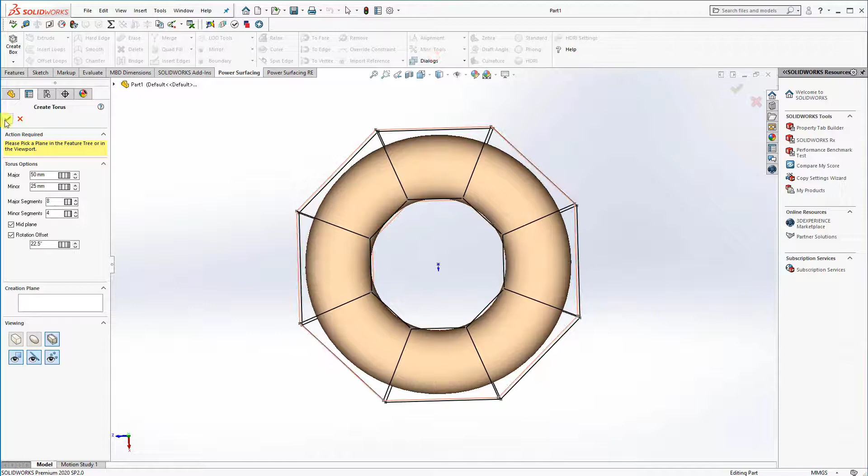In this video, I'll be making a simple ring design to demonstrate some of the features available in Power Surfacing for SolidWorks. I start by creating a torus and rotating it to be in a better orientation for editing. I then crease the inside faces and adjust the inner diameter.

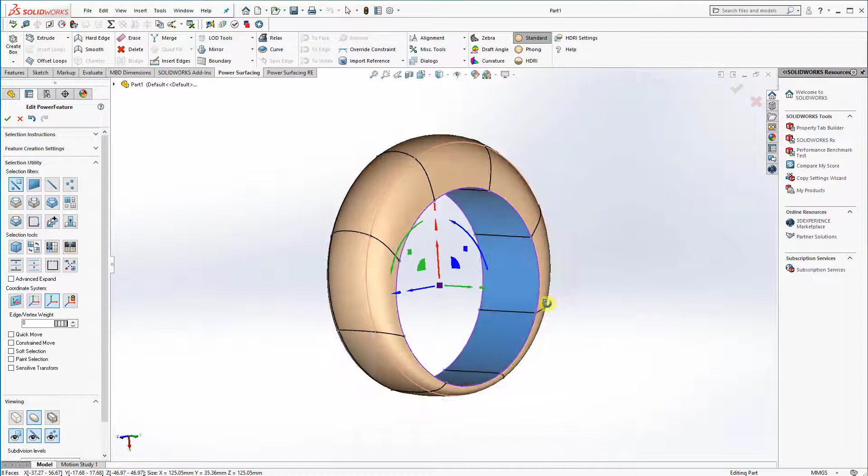Next, I turn on soft selection and set the value to 70 to distribute the effects of my changes over a larger area. I then select the bottom section and narrow it to give the ring its overall shape. Next, I adjust the top face and crease it.

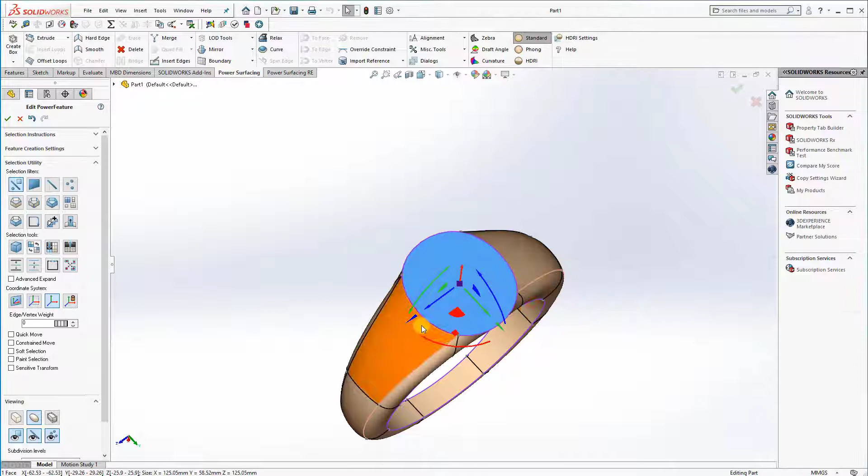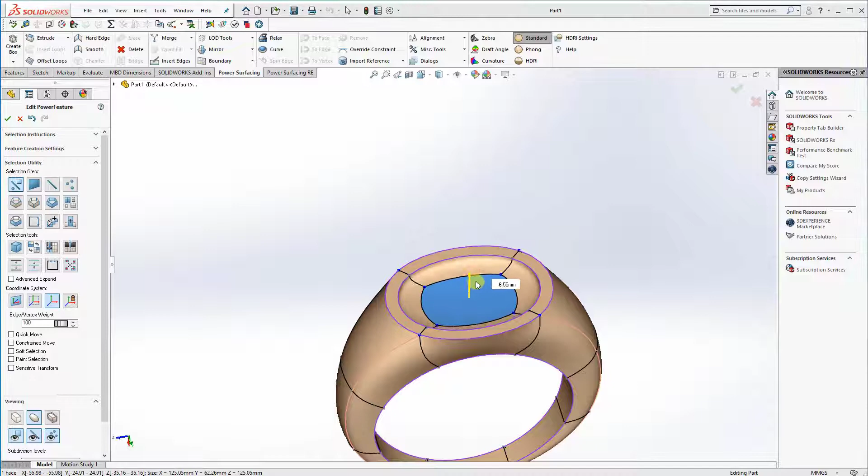I then use the offset loops tool and crease it again. With the top face selected, I hold the A key and extrude the top face into the ring. Now I use insert loops to square up the shape a bit.

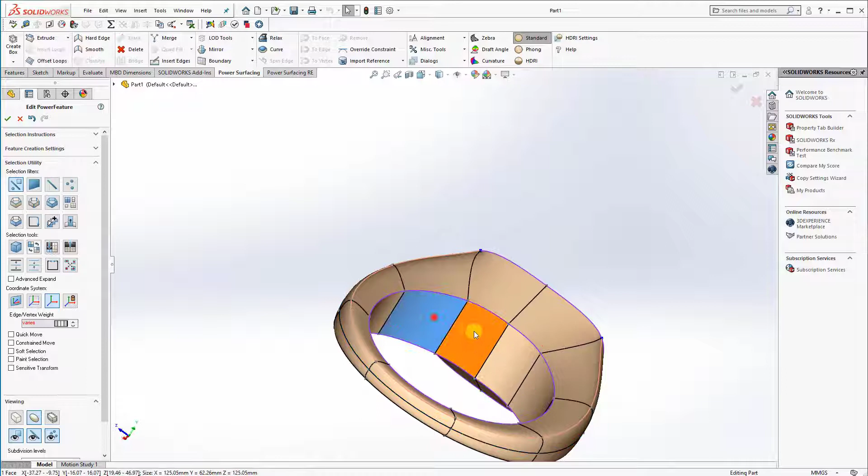Looking at the bottom of the ring, I select the 4 faces on the underside and use offset loops. I then crease it and adjust the width a bit. Now, holding the A key again, I extrude these faces into the bottom of the ring to reduce the material usage.

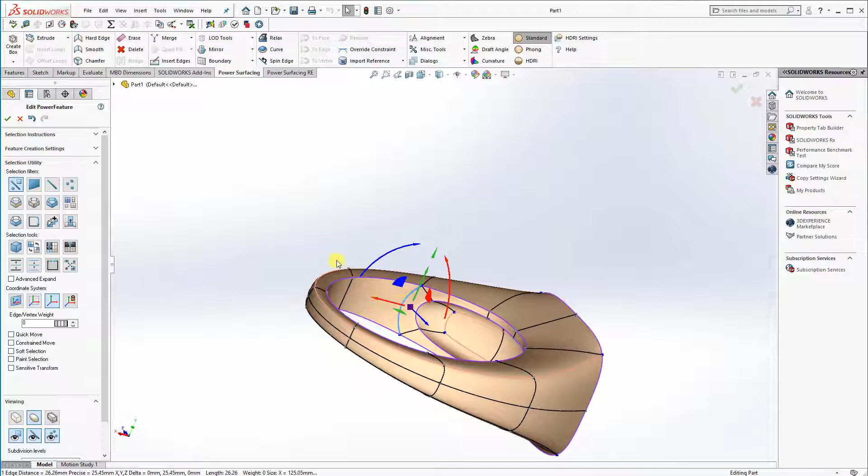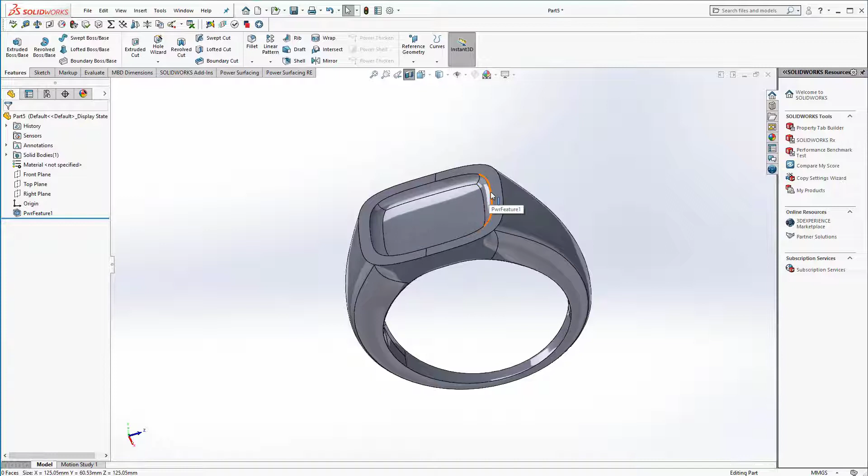Finally, I adjust the edge weights and remove some extra edges to smooth out the overall shape. From here, I can convert it into SolidWorks. Using one of the top edges as a reference, I create a plane. Now I create a sketch on that plane.

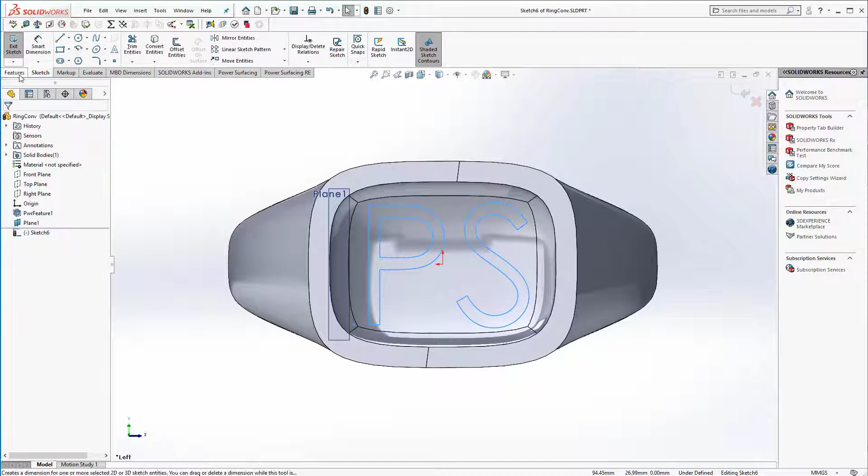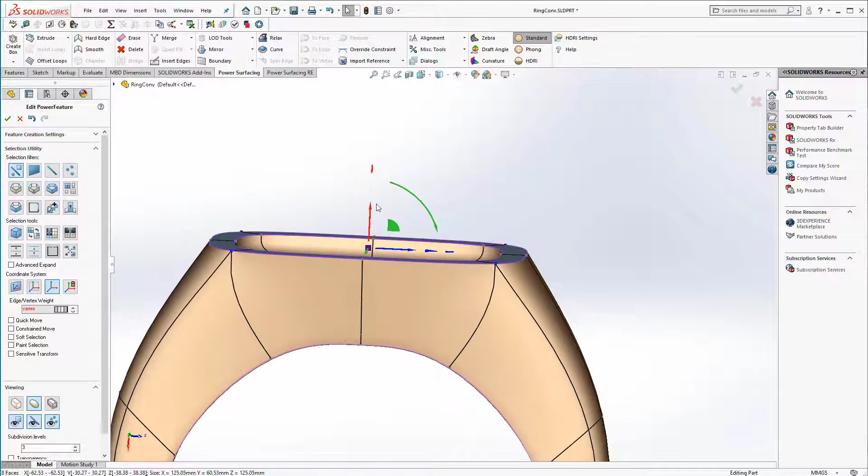Now I extrude it up to next to have it meet the top surface of the ring. If I wanted to adjust this to add more depth, I can go back and edit the ring. Here I raise up the rim of the ring. When I convert it back to SolidWorks, everything updates to match the current changes.